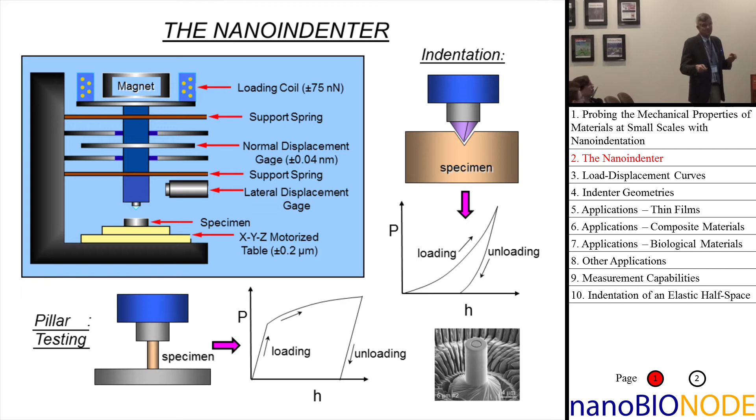And also, I would point out that you don't have to test flat things. You could test water balloons if you want to and learn things about the properties of the water balloons. The whole idea behind this instrument is it measures forces and displacements down at the scale that you need to probe the mechanical behavior of what's going on in your specimen. But as I go through, specimen is flat and specimen is smooth, okay?

And the point is that by having a loading curve and an unloading curve, you then have some information about elasticity and plasticity. There's basically 2 equations there, a couple of unknowns, and so you can use the data in those curves to extract basic information about elastic and plastic properties of the material.

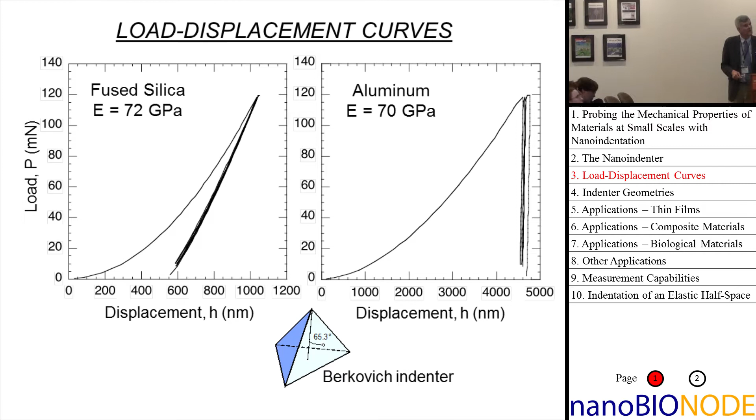I'm often asked, what's the smallest nano indentation that you're comfortable making and taking property measurements out of? And the answer is that in my systems, the ones that I work with, about 50 nanometers. I don't really want to work below 50 nanometers. Life gets too messy. Lots of issues there, so we don't need to talk about that.

All right, now, again, starting from the presumption that you've got a flat surface and you're going to be pushing into that surface with an indenter, the one thing that you want good control over is what the geometry of the indenter is. And there are a lot of different geometries that you can use. The one that we like to use is this Berkovich. We like this one a lot, the Berkovich indenter. It's a triangular pyramid.

The reason we like that one is that a 3-sided pyramid naturally terminates at a point, and so you can maintain geometric self-similarity to very small depths. That is very different from what happens with the Vickers indenter, which is this classic thing used in microhardness testing. That's a 4-sided pyramid, and unless you're very lucky, a Vickers pyramid does not terminate at a point, it terminates at a chisel edge. It's like the roof line on a house.

And what happens then is that you start off at big scales and things look geometrically self-similar, and then as you go to smaller scales, the geometry transitions from being pyramid-like to being chisel-like. And you don't want that to happen. You want to maintain the geometric similarity, and that's why we like that indenter.

Cones, in principle, are really important indenters to have, because a lot of the modeling that we do is done with conical indenters because the axisymmetric nature of them makes them simpler. The problem with a cone is you can't get the diamond guys to grind you one that is geometrically very, very perfect. You can see that this one, there's some fourfold symmetry to that contact. That's because it's ground out of a 100 diamond, and the grinding itself is anisotropic.

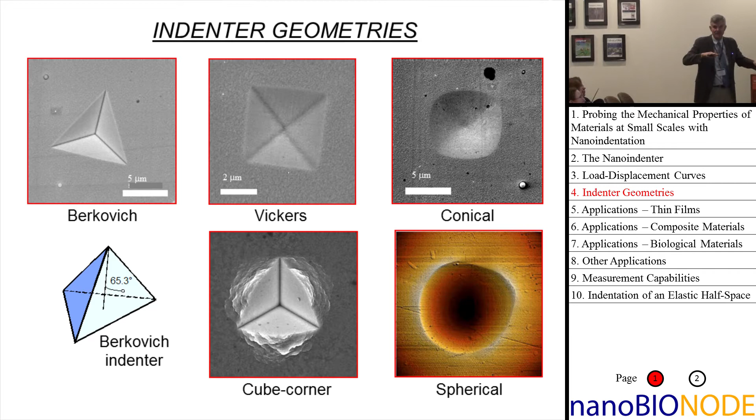Okay, again, I'm working on flat surfaces, right? You guys want to work on water balloons and things like that. Okay, I know people don't like that term water balloon, but internally stiffened water balloon or whatever it is. Okay, so where are the applications for this stuff? Well, in the old days.

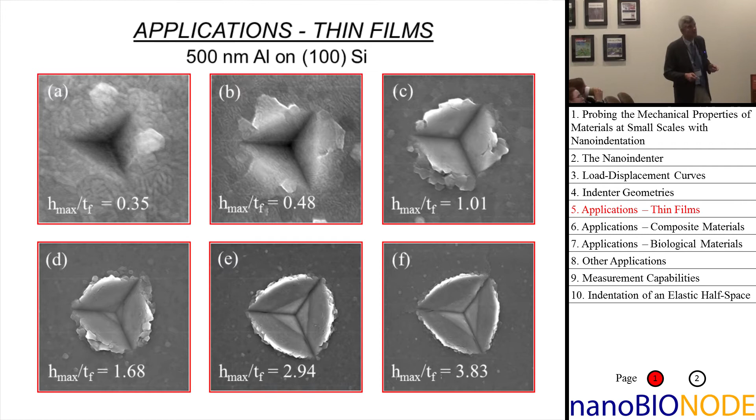Well, you might say, I know what the properties of aluminum are. Well, you may know what the elastic modulus of aluminum is, but you don't know what the hardness is because hardness depends on the way that the material is processed, and they were very interested in knowing what the hardness of these films was as well. And so this was really where nanoindentation took off.

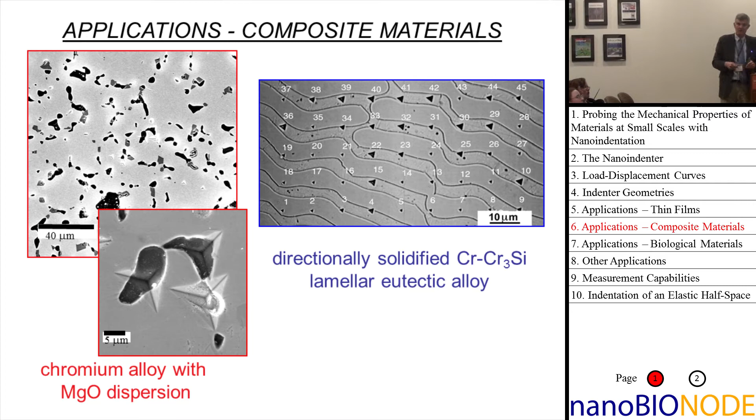And basically the difference here is that this chromium silicide phase is extremely hard. And so that's this phase, which has very small indentations, all made to the same load. And this is then the softer phase, which is the chromium phase. Chromium is actually a pretty hard metal, but it's softer than the chromium silicide, and so you start to get bigger indentations. And you can use this tool then to probe and map the hardness along a surface with sort of micron resolution.

There are a lot of applications in bone, and I'm not an expert in this, but we've dabbled in this a bit. I actually got started in this in an interesting way, and I think we were probably among the first people to do some of this work. That happened because I was approached by, I was in Tennessee, in the eastern part of Tennessee. In the western part of Tennessee is the University of Memphis, which has a very good bioengineering department. And there was a very good faculty member there at the time by the name of Jae-Young Rho, who was a bone guy.

Tragically, Jae-Young Rho, at the age of 39, died of a heart attack on New Year's Eve in 2001, I think, and it was a great loss to the community, because that guy was really bright.

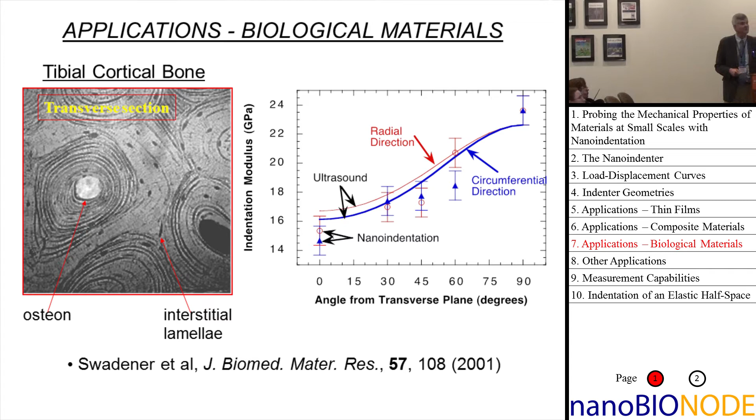Other applications, I put this one in because that's a biomaterial, right? That's a soft biomaterial. That part's a soft biomaterial. The reason that I put this one in is that this is actually what the very first commercial nanoindenter was sold for. It was sold to probe the properties of ion-implanted layers that are put onto hip joints to harden the surface. And this is another good example of the kinds of things that can be done.

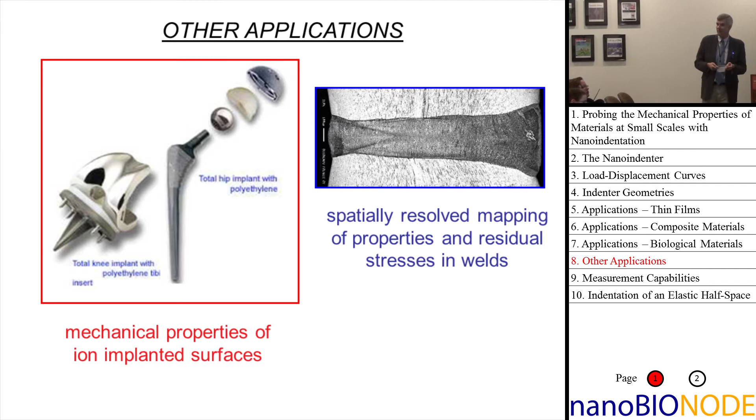The ion-implanted layers are only a micron thick or so, and no one had any idea how much that was really hardening that surface. And so nanoindentation, being able to do this at 100 nanometers or 10 nanometers or so, the first commercial nanoindenter was sold to a company that was interested in trying to determine what the hardness of the surface layer was on that hip joint.

Now, this gets into sort of the Nano 101 course. So that, in a nutshell, there's the 4 hours of this course, which we're not going to do. I like to point out that there are a whole lot of things that you can do with nanoindentation, and so the sky's the limit, and I don't have many bio things listed up here, so you could add the bios on if you wanted to. We probably ought to do that. The instrument itself can be used in several different modes when testing hard materials.

This talk is mostly about indentation, where we're using this thing as an indenter. But you can also use this thing for scratch testing. So scratch testing, if you've got a film or a hard surface or something or other, and you want to determine if it's resistant to scratching, you bring the indenter down on the surface, and then you drag the surface laterally. Some instruments are set up to where they're instrumented not only to measure the vertical forces and displacements, but also the lateral forces and displacements. And that tells you lots of things about what's going on during the scratch testing.

Fiber pushing, this is something in the composite materials design. I don't have a picture here. I got one the other day. I forgot to put it on here.

The idea is you cross-section a fiber strengthened material, and if you make these things in special ways, you can go in on the fibers and push on the fibers, and if you're lucky, you can make that fiber start to move in the matrix. And when it moves in the matrix, it's starting to tell you things like what is the friction between the fiber and the surrounding material, and those become extremely important to designers, where in composite design, it's mostly about what are the properties of that interface and how is energy dissipated at that interface.

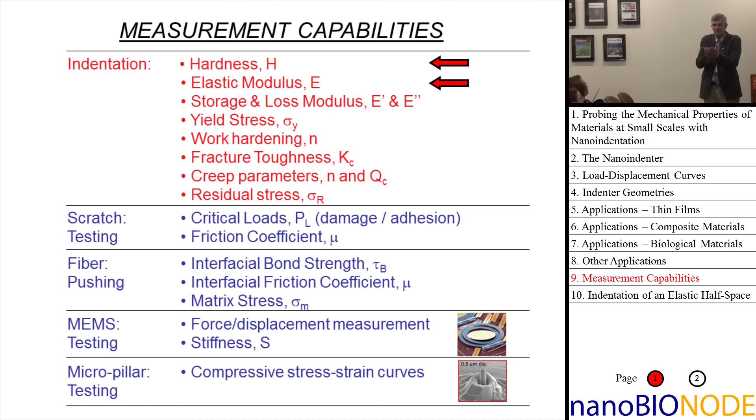Fracture toughness, we're still working on. There's some things you can do there. Michelle knows some things about that. Creep, it's getting really difficult. And actually, I need to move residual stress up the list because we're getting better on the residual stress things. But these are all mechanical properties of the material that you can measure with this thing in the indentation mode with some simple principles of physics.

So let me talk about hardness and modulus. In order to do that, you have to have a model for what's going on because you're going to take this load displacement data and you want to back out what's happening. The model that we use is actually one for elastic deformation of a half space. It's intended to model what happens in the unloading curve, being the one that's primarily elastic, at least in an elastic plastic material. If you're in a viscoelastic material, you can't do this anymore, by the way.

So beware. If it's viscoelastic, as a lot of biological materials are, then you have to do other things. But if it's just elastic plastic, then there's this model from Sneddon that tells us everything we want to know about forces and displacements for any shape of an indenter as long as the thing is axisymmetric.

Now that's a big mess, but one of the things that we showed early on is that all this mess up here can be simplified to a very simple relationship that looks like this. This says simply that the stiffness of the material in contact, which is the slope of the force-displacement relationship. So we're measuring forces and we're measuring displacements. We can measure that slope with a lot of accuracy, that's equal to 2 times the effective modulus. The effective modulus is a combination of the modulus of the material and the modulus of the indenter,

times the radius of contact, which then translates to an equation that looks like that in terms of the area of contact. And so this equation, stiffness equals 2 over square root of pi, E effective times the square root of A, becomes the basic equation that we use to analyze a whole lot of stuff that's going on in nanoindentation. And the idea is simply this, that S is measurable from the force displacement curve.

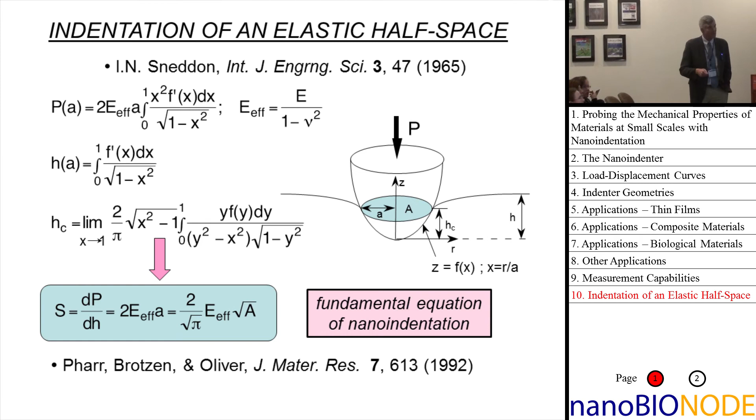And if we can measure S from the force displacement curve, then if we know the modulus, then we can get the contact area, and that gives us something about the hardness. Yeah, we'll get to that in the next slide. Or if we know the contact area, then we can use that to measure what the modulus is, okay? So that is sort of the fundamental equation of nanoindentation.

So the question that was asked is, how do we get these two things separately? And that requires a slight leap of faith, and a lot of people don't appreciate this, but there is a slight leap of faith. It is based on the idea that the Sneddon model is correct, but the Sneddon model is based only on elastic deformation. The plasticity is not built in there, and there are complications that are as a result of that.

But if you believe the Sneddon model, then the basic way that you get those parameters is through this series of equations. That the contact depth can be determined from 3 measured parameters. Those are the maximum depth of penetration, the maximum load of penetration, and the measured unloading stiffness. Those are all measurable quantities.

That the contact depth is given by those three parameters, a geometric constant, which we think is close to 0.75 for reasons that we can talk about later. And that gives us the depth along which contact is made between the indenter and the specimen. Now, that works in about 90% of the cases, but it doesn't work in 10% of the cases. And the 10% of the cases in which it doesn't work are the ones where the material has strong tendency to pile up, where things are very, very plastic. Then there's going to be a problem because you don't get the contact depth right.

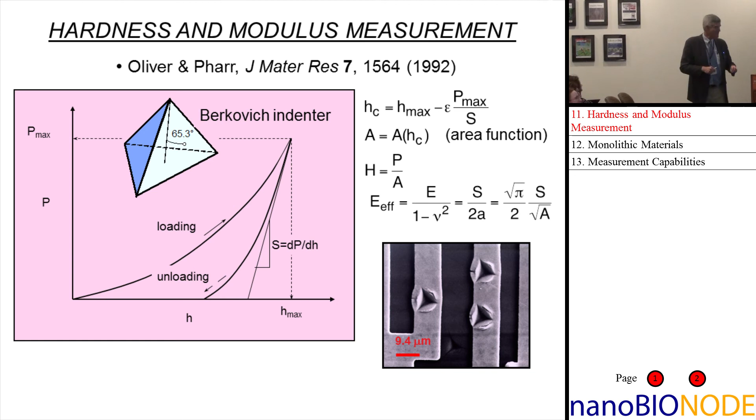So is H a constant depending on the depth? Hardness? Yeah. Boy, you're just setting me up perfectly today. So next slide, okay? So we'll go to the next slide, and that's probably going to be a good place for me to stop the morning stuff.

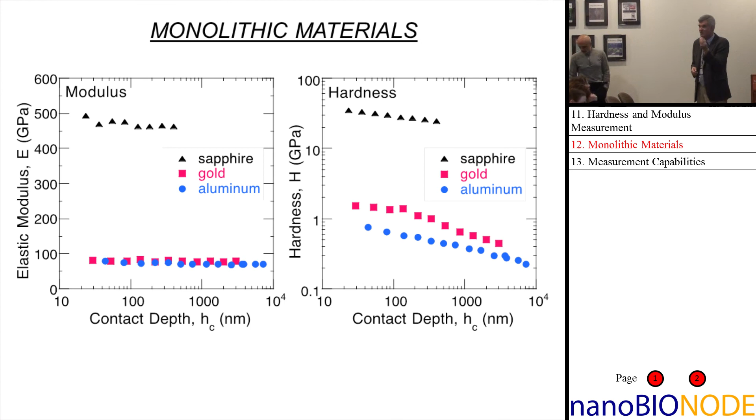When nanoindentation came in the late 80s, early 90s, people started seeing these things and they started asking what's causing that. And so there's a whole wealth of literature out there right now on the nature of that. And it gets back to this thing that I implied a little earlier, which is as you get smaller, the number of defects that are present in that material starts to change in a significant way and can change properties.

So that's probably a good place to stop. Tomorrow, I know there's going to be a lot of interest in this audience in storage and loss modulus. So maybe tomorrow I'll start from there and pick up with a few examples of some stuff that I've done in what I call soft materials, which are not really very soft. Thank you very much.

We have one question. One of the things I noticed is that depending on the condition of your tip, you can get very different values for hardness. Can you explain why that is? Yeah, so that's a very good point. So all the data that I showed you here this morning is done nominally with a sharp Berkovich tip. And tips, even Berkovich tips, you use them a few times, they start getting dull. And the tip geometry starts to change.

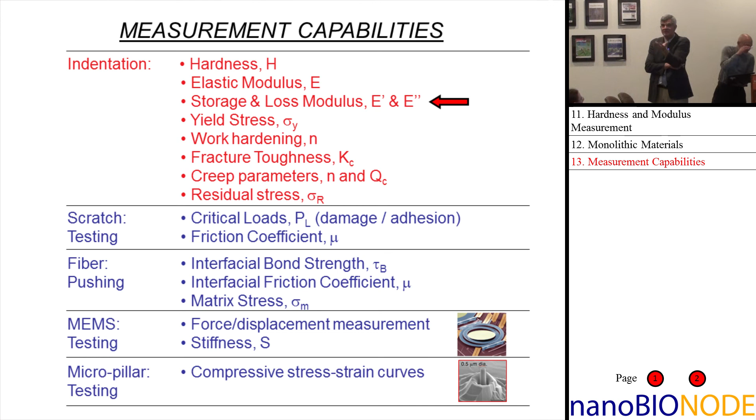When the tip starts to get rounded, then the contact mechanics at small depths are changing from perfectly sharp elastic-plastic contact towards the contact mechanics of spherical indentation, which starts off with finite stresses and elastic deformation only. So if you've got a dulled tip, and this is something that a lot of folks don't appreciate, then there is a change in the basic contact mechanics as you go from large depth to small depths that, if you don't account for properly, will make it look like the material properties are changing. Is that answering your question? Yeah, good question.